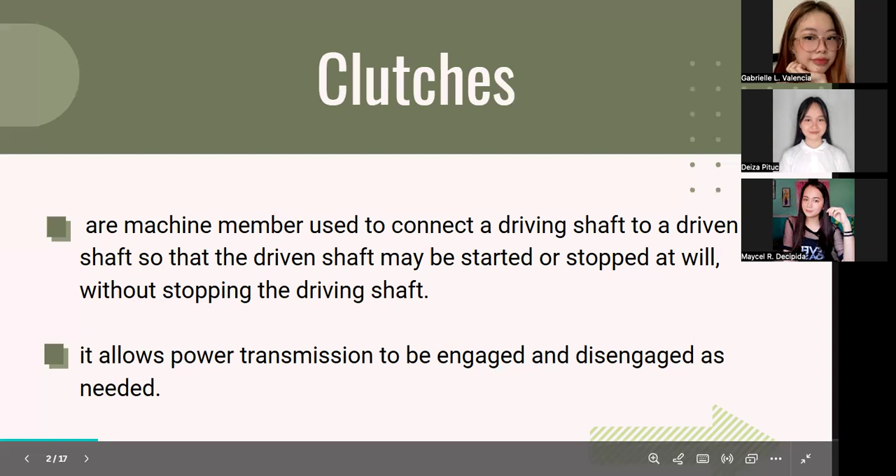For types of clutches, we actually have two main types: the positive clutch and the friction clutch. The positive clutch is called so because it uses interlocking jaws, teeth, or keys to transmit torque directly. As we can see, the two shafts, driving and driven, are directly connected using jaws, teeth, or keys to transmit the torque directly. With this, we actually have zero losses or slippage, that's why it is called positive clutch.

Meanwhile, the friction clutch, from the word itself, uses friction between surfaces to transmit torque. Because there is friction, there are slight losses and possible slippage from the two shafts. The advantage of friction clutch is that it is typically used in vehicles requiring smooth power transmission. Meanwhile, the positive clutch is rigid and instant, so there is no slippage.

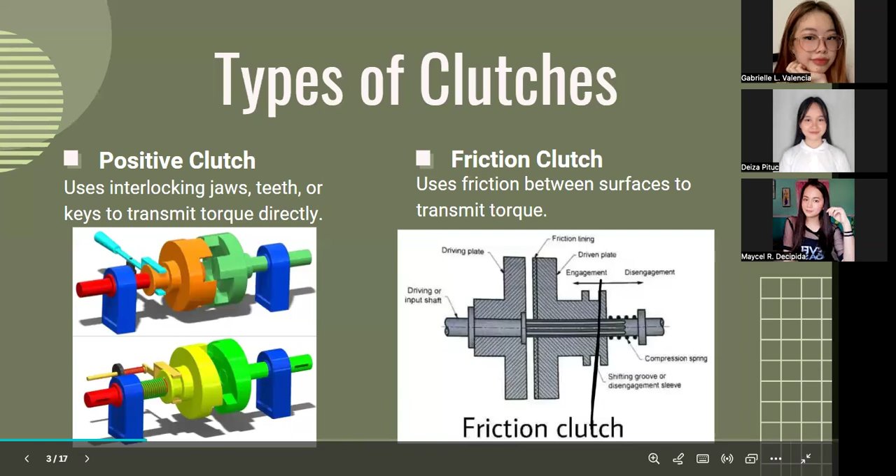For the next topic, design of clutches. The following considerations must be kept in mind while designing a friction clutch. Number one, suitable material forming the contact surface should be selected. Two, the moving parts of the clutch should have low weight in order to minimize the inertia load, especially in high-speed service.

This means we need to minimize the effect of applying load here when we speed up or slow down. Then, third, the clutch should not require any external force to maintain contact of the friction surfaces. Number four, the provision for taking up wear of the contact surfaces must be provided.

Five, the clutch should have provision for facilitating repairs. Six, the clutch should have provision for carrying away the heat generated at the contact surfaces. Seven, the projecting parts of the clutch should be covered by a guard.

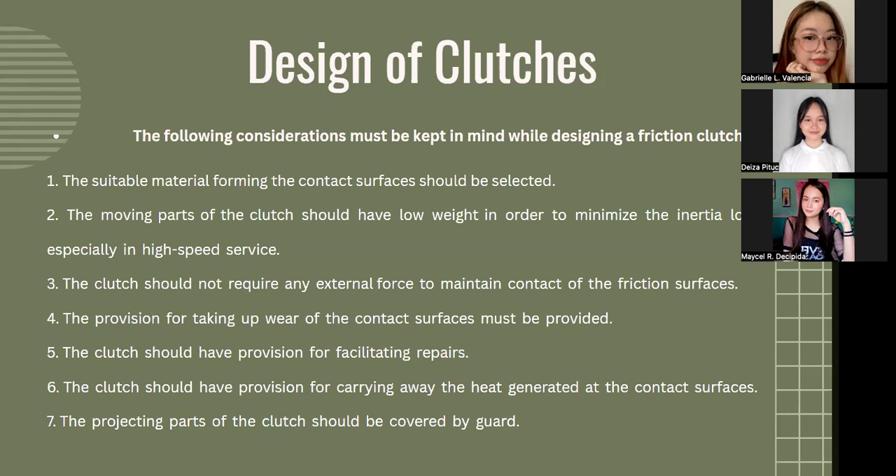Next, the material used for lining of friction surfaces of a clutch should have the following characteristics. Number one, it should have a high and uniform coefficient of friction. Two, it should not be affected by moisture and oil, because there is a possibility of slippage. Three, it should have the ability to withstand high temperatures caused by slippage. Number four, it should have high heat conductivity. And lastly, it should have high resistance to wear and scoring.

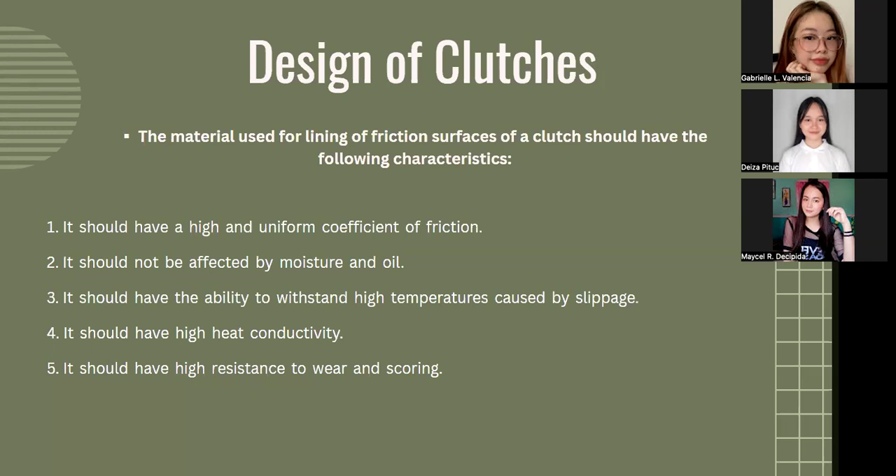The next is single plate clutches. A single disc or plate clutch consists of a clutch plate whose both sides are faced with a frictional material. As we can see in the picture, the clutch plate faces the frictional material on both sides. This is the clutch plate, facing the frictional material.

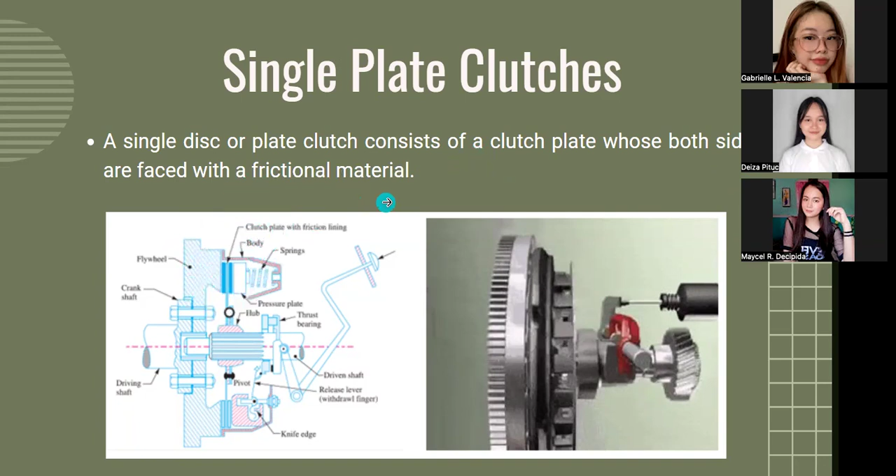Next, multiple plate clutches. Imagine you need to transmit a large torque. Just one pair of friction surfaces may not be enough. That's where multiple plate clutches come in.

These clutches have several discs placed alternately between the driving and driven components. The inside discs, usually made of steel, are connected to the driven shaft, but they can slide slightly back and forth along it. The outside discs, usually bronze, are connected to the driving shaft and housing, often with bolts. When you engage the clutch, all these discs are pressed together, creating a lot of friction, and that helps transmit a large amount of torque.

These are commonly used in motor vehicles, machine tools, and racing bikes because of their compact size and high torque capacity. Next.

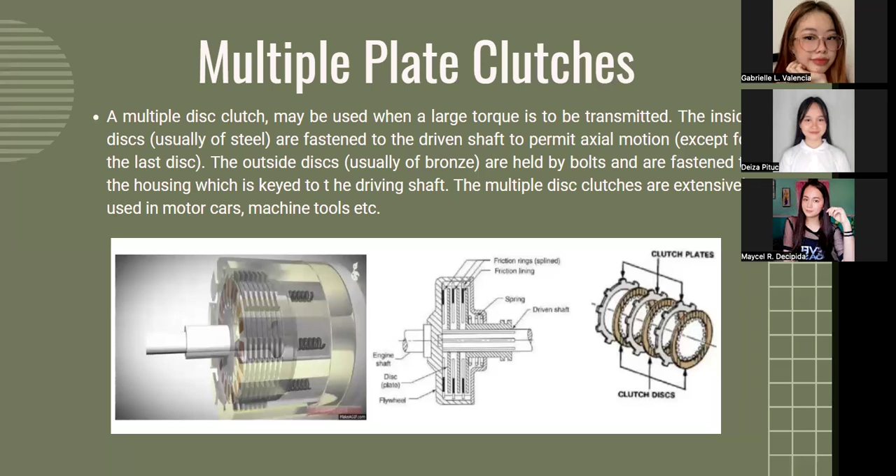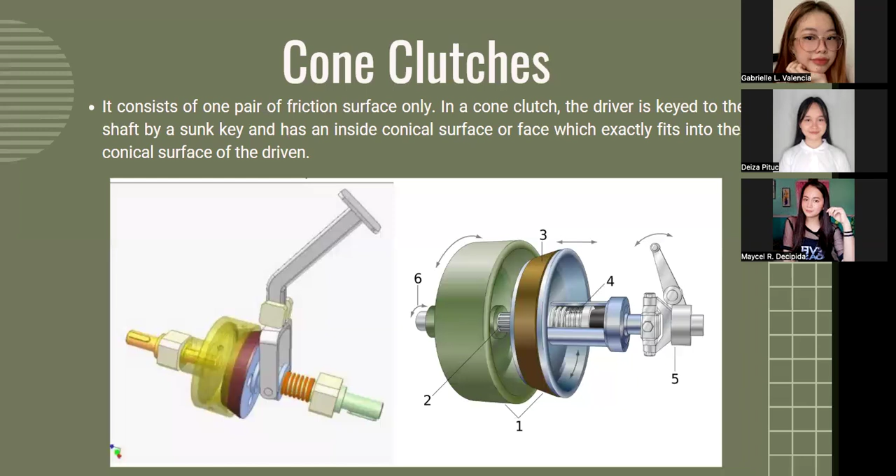Centrifugal clutches. This is different because it works automatically based on speed. A centrifugal clutch is usually built into the motor pulley. It has shoes or pads mounted inside the pulley rim. As the motor speed increases, centrifugal force causes the shoes to move outward and press against the drum. This pressure creates friction and gradually engages the clutch.

It is common in scooters, go-karts, and small machinery where automatic engagement is helpful. Next.

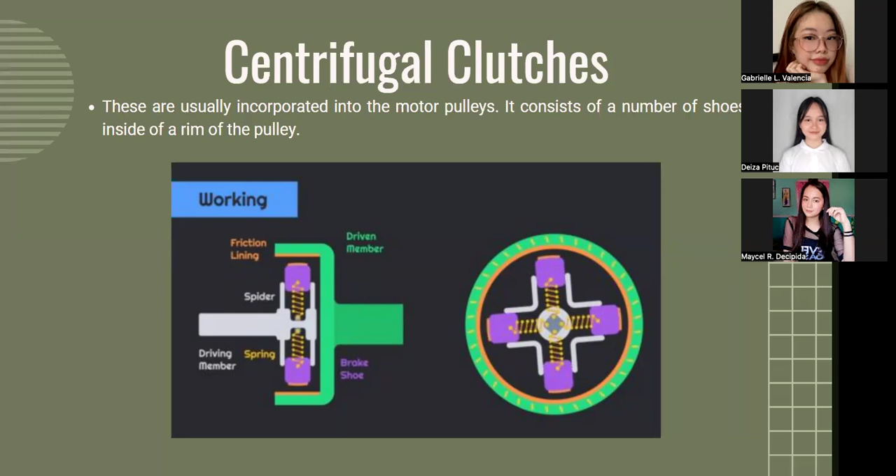So we are now going to proceed with the formulas for disc or plate clutch. This is the formula for uniformly distributed pressure theory for a new disc clutch to be designed. Pressure produced by mating surfaces because of axial load, FA. So the thing we're solving for here is P, equal to FA,

or axial force or axial load, all over pi over 4 times d squared, outside diameter squared minus inside diameter squared. So FA is actually also equal to Fn, or the normal force.

Next, what we're solving for here is torque transmitted or rating. So T is equal to Ff times rf times nc, or the number of friction or contact surfaces.

Another formula for torque is mu times Fn, or normal force, times radius times number of friction or contact surfaces, NC. And then this is essentially equal, since Fn equals Fa, so Fn is just replaced by Fa and the rest stays the same.

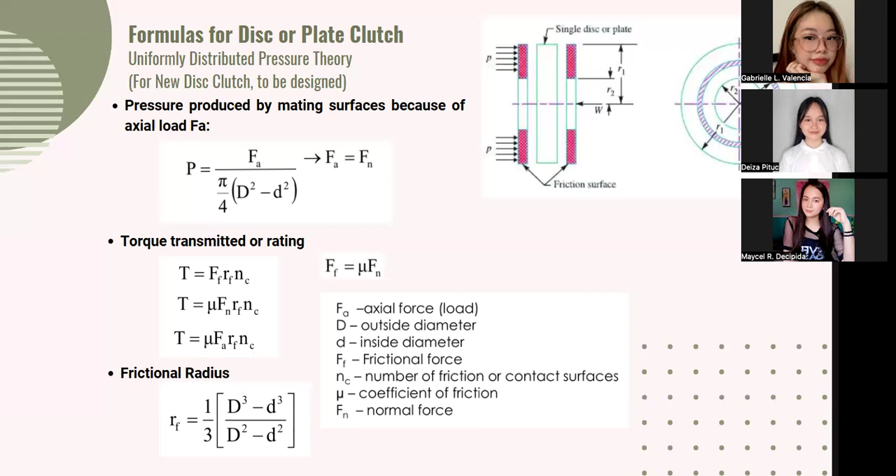For the old clutch, same as before, uniformly distributed pressure theory, formulas for disc or plate clutch. But this time it is for the old disc clutch.

So when we are finding the pressure produced by mating surfaces because of axial load, we have P max, P minimum, and P average pressure. So for P max: FA all over pi D over 2 times D minus D, or axial load all over pi times inside diameter over 2, outside diameter minus inside diameter.

So for minimum, it's the same thing. The only difference is the inside diameter over 2 becomes outside diameter over 2.

So for P-mean, it's almost the same. The only difference is that instead of d over 2, it's replaced by our mean diameter, or the outside diameter plus inside diameter over 2, so dm over 2.

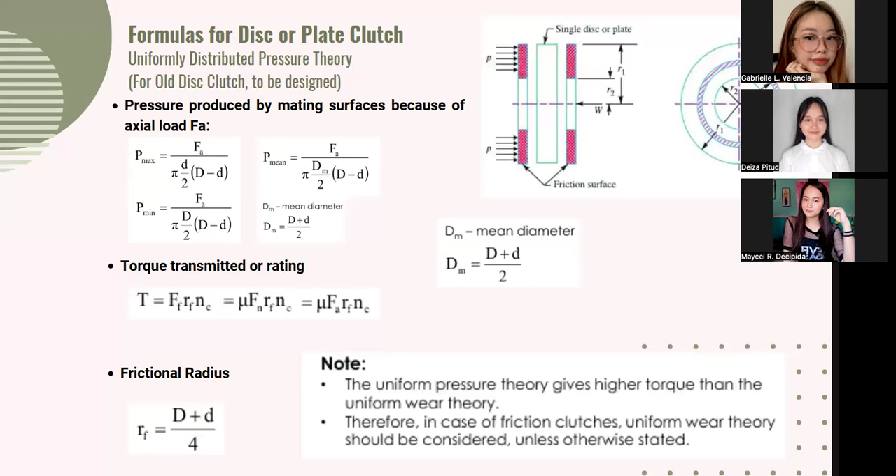Next is uniform distributed pressure theory for new cone clutch to be designed. So, dito naman, sa pagkuha naman ng pressure produced by mating surfaces because of axial load force. So, sa pagkuha nito, P is equal to FA over pi over 4 multiply by outside diameter squared minus inside diameter squared.

So, sa pagkuha naman ng sin alpha is equal to axial force over normal force.

Then next is, sa pagkuha ng torque transmitted or rating naman nito, ang gagawin lang is T is equal to frictional force multiply by frictional radius multiply by number of coefficient. Then next is, sa pagkuha din nito, mu is multiply by normal force multiply by frictional radius multiply by number of coefficient.

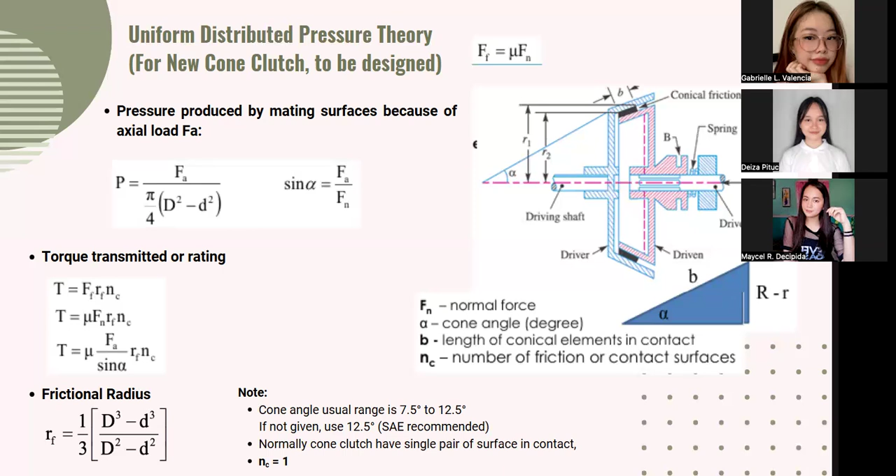Frictional radius equals to 1/3 times outside diameter cube minus inside diameter cube over outside diameter squared minus inside diameter squared. Note, cone angle usual range is 7.5 degree to 12.5 degree. If not given, use 12.5 degree. Normally, cone clutch have single pair of surface in contact. Number of contact surfaces equals to 1.

Uniform wear theory for old cone clutch already installed. Pressure exerted by the mating surfaces of the cone clutch is directly proportional to the axial load applied to the clutch. For maximum pressure, formula is FA over pi times D over 2 times outside diameter minus inside diameter.

For minimum pressure, equals to axial load over pi outside diameter over 2 times outside diameter minus inside diameter. For mean pressure, FA over pi mean diameter over 2 times outside diameter minus inside diameter.

For torque transmitted by the cone clutch is determined by the frictional force, the frictional radius, and the number of contact surfaces. The formula is FF times RF times NC, or mu times Fn times RF times NC, or mu times FA over sine angle times RF times NC. Frictional radius RF equals to outside diameter plus inside diameter over 4.

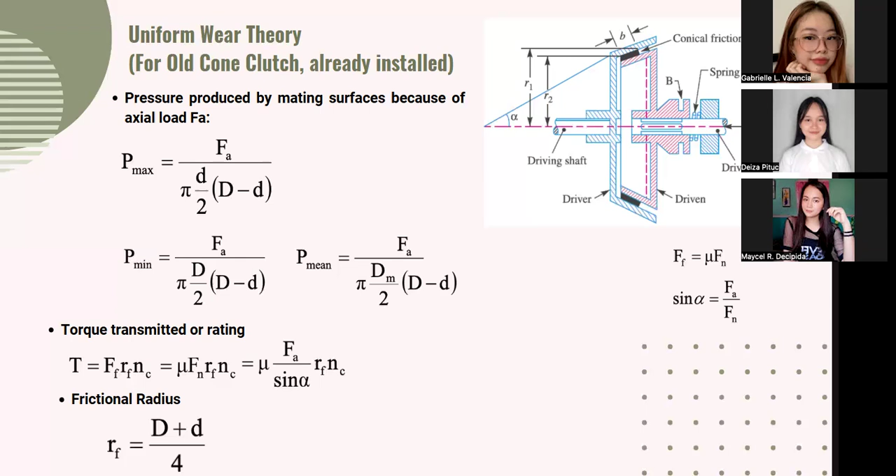Next. Proceed na po tayo sa may problem solving.

So for problem solving number 1, a plate clutch has a single pair of mating surface, 30 cm outside diameter and 22.5 cm inside diameter. The maximum pressure was found to be 825 kilopascal, considering the coefficient of friction of 0.25. Find the power that can be handled based on the drive that rotates 200 RPM, considering that this clutch has been used already, or this clutch is already installed.

So, note lang po, coefficient of friction natin, the NC natin is only equal to 1 since it was stated directly that it has a single plate clutch.

Okay, so proceed tayo sa given. As for the given, we have the outside diameter of 30 centimeter, or it could be also equal to 0.3 meter, and inside diameter of 22.5 cm, which is also equal to 0.225 meters, and then Pmax of 825 kilopascal, and then mu of 0.25, n, or the RPM of 200, and then NC of 1.

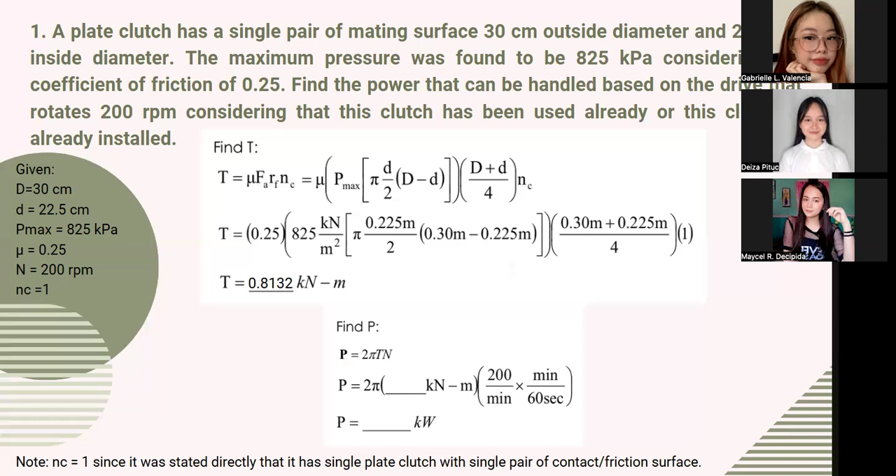0.8132 kilonewton meter. So, for the power naman po, inhanap natin yung power through 2 pi Tn. Since meron na tayong value ng T, pwede na tayo mag-proceed sa pinaka-formula: 2 pi times 0.8132 kilonewton meter times 200 per minute. Yung minute po natin, i-convert lang natin into seconds para maging kilowatts, kilonewton meter over second. So, the answer is 17.032 kilowatts.

So for example number 2: in a new disc clutch, the outside diameter is 8 inch and the inside diameter is 4 inch. An axial force of 400 pounds is used to hold the two parts together. If the coefficient of friction of the mating materials is 0.4, how much torque can the clutch handle?

So, ang given natin dito is the outside diameter, which is 8 inch, then the inside diameter, 4 inch. Yung axial force is 400 pounds. Then yung coefficient of friction is 0.4, and the number of coefficients is 1. Kahit na hindi siya stated na single disc plate or sinabi yung number of contact niya, ang number of coefficient natin is 1. So, ang hinahanap dito is torque.